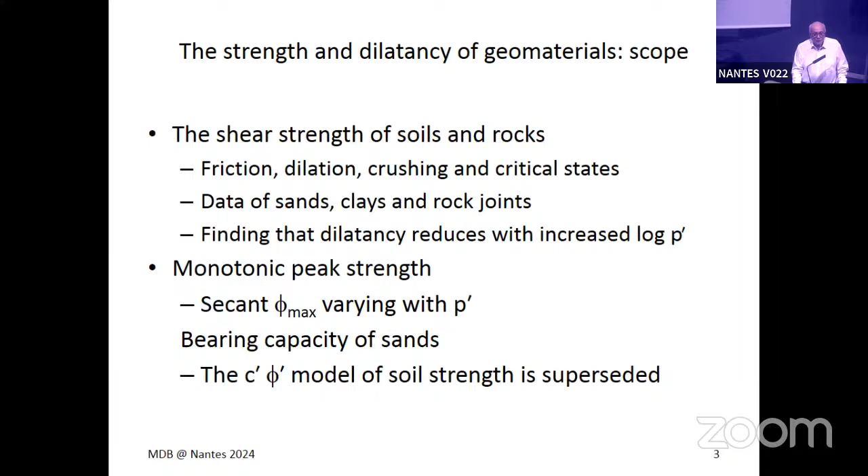As you can see, the not-so-hidden agenda on the last line is to try and persuade the geotechnicians among you to dispense with the linear envelope of a Mohr-Coulomb criterion.

So we all know what these materials look like. I've just shown a picture of a sand, a clay, courtesy of Pierre Delage, nice microscope views, and a rock joint from Nick Barton. I met Nick Barton about 20 years after I published Strength and Dilatancy of Sands.

We shared a coffee together, and at that point realized that he had undertaken a study of the strength and dilatancy of rock joints, which effectively told an identical story, as you will see.

It's the incompatibility in a granular material between an analytical macroscopic surface that you might want to analyze and the fact that grains or rock asperities collide with each other, that creates a confusion and a source of difficulty of understanding for geomechanics people.

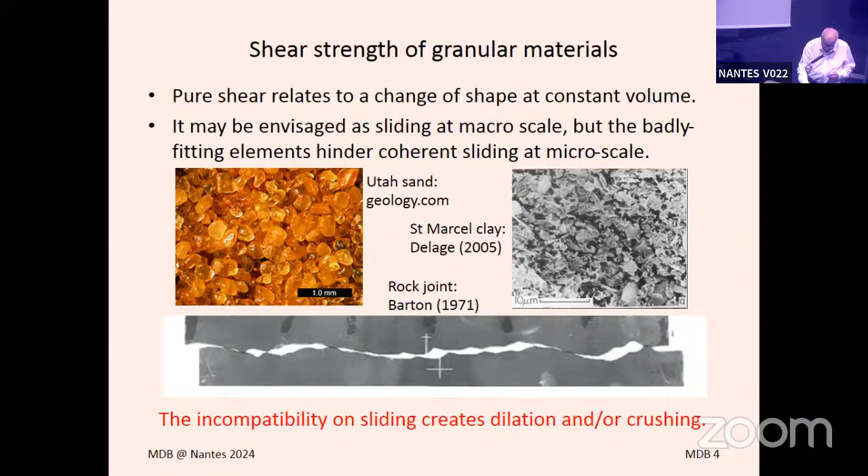The view that I have, or had originally, was bottom left: the interference between two micro-scale protrusions. So you can think of the bottom picture there as a grain inside a simple shear or direct shear apparatus, interfering in shearing on the black plane with a grain in the lower part of the box.

At its most simple, the question then arises: will one of these grains break, permitting the shear to take place? Or will the top grain ride over the lower grain at what I've shown here as an angle psi, which, if it did do that, would be the angle of dilatancy.

So in this very simplified view of friction and dilatancy, we have a macro plane of sliding, which is the black plane, the horizontal plane in the diagram here. We have psi, the angle of the actual shear surface.

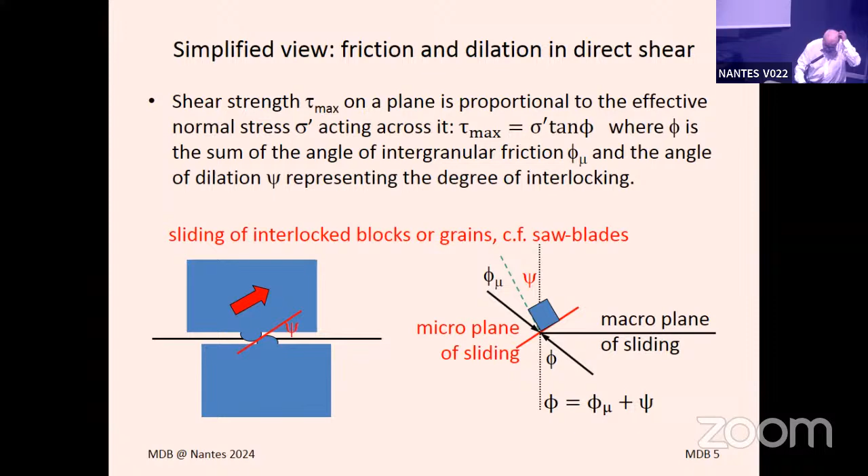So in the very bottom line of the slide, the apparent angle that we call the angle of friction, phi, is made in this simple view of two components: phi mu, which really is friction, and psi, which is this geometrical effect of the difference between the microplanes of sliding and the apparent macro plane. So there are two components, friction and dilation.

A question of a semi-technical nature: can I plug a mouse into this computer? Does anybody think? Because I have a mouse. I've forgotten how much I use... my pointer. Very good. Thank you very much. Sorry about the interruption. Thank you.

Oh, yes, yes. So, having introduced that, that there are two components at issue in what we call the angle of friction of soil.

I now spoil that by pointing out that if you do discrete element analysis, as Colin Thornton did with his research student Barnes in 1986, and if you plot the magnitude of contact force between two disks, this is a two-dimensional array of disks, where the thickness of the line, the blackness of the image on the screen, is proportional to force.

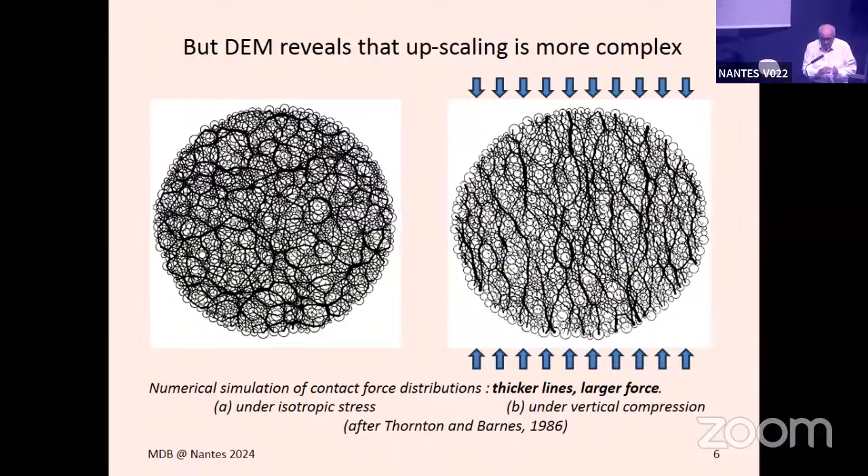So chains of grains that have almost coincident contact normals can act as potential struts in a three-dimensional truss, since soil is actually a three-dimensional granular structure. The other grains, carrying almost no force, act as sufficient bracing to the truss to prevent it buckling or disintegrating.

Eventually, if you increase deviatoric force, there is deformation at grain contacts, maybe crushing, maybe sliding, that causes links to disintegrate. Then the grains have to find a new equilibrium. They move until some arrangement finds it can carry the load. That is the source of deviatoric or shear strain, the grains slightly readjusting their position to find a new stable, strong force network.

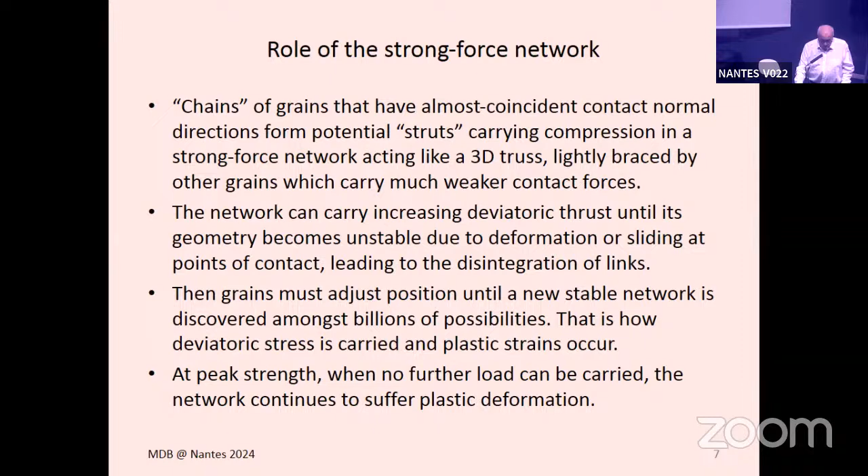Let us move on to some further information: the angle of friction of silicates on silicates.

An atomic plane of quartz sitting on another atomic plane of quartz, like two glass-like surfaces, has a very low friction angle of about 10 degrees. There's a paper by Matthew Coop and his co-workers, Senetakis and Todisco, in 2013, demonstrating this surprisingly small friction angle. If you shear soil or sand at constant density, and it's not dilating, maybe it was just loose sand, then you get a much larger angle.

This is the critical state angle of friction. You can get that from the ultimate strength in a shear box test, a simple shear apparatus, or a triaxial test, if you go to the trouble of drawing a Mohr circle of stress and dropping a tangent onto it from the origin. What you find is that for rounded quartz sand, you get maybe 32 degrees.

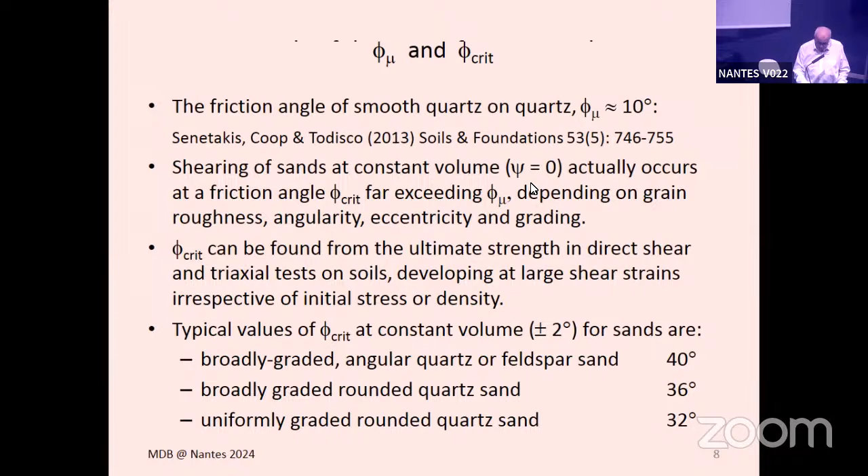So the question arises: if the angle of friction of quartz on quartz is 10 degrees, and the lowest conceivable angle that we call friction at a critical state, when shearing sand at constant density with no dilation, is 33 degrees, where does the other 23 degrees come from?

To cut a long story short, it's difficult to illustrate why that is the case. We just find that it is. We find it in soil tests that 33 degrees as opposed to 10 degrees. We find it in discrete element analysis, where the computer analysis of contact deformation gives us, if it's a very careful simulation, the same large angle we would call the critical state angle of friction.

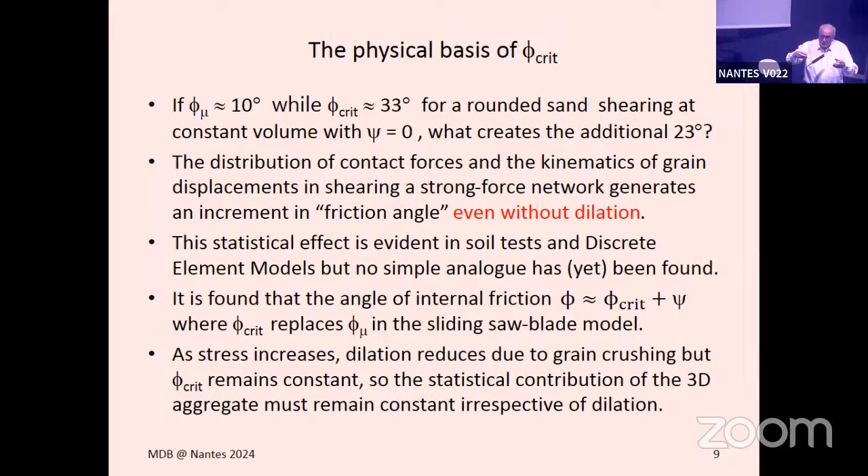And so we finally arrived at the well-known position that if we plot secant phi, that is dropping a tangent from the origin of a stress graph onto the Mohr circle, or finding the inverse tangent of the stress ratio, shear stress over direct stress, then for a dense material, we get phi max, which, as I just told you, can be in excess of 50 degrees.

And then that phi value drops eventually on continued shearing to its critical state value. If you've got loose soil, it painfully climbs up its shear stress strain graph until it reaches the same critical state value. The loose soil contracts, gets smaller in volume, the dense soil dilates. So this is familiar to us all, I suppose.

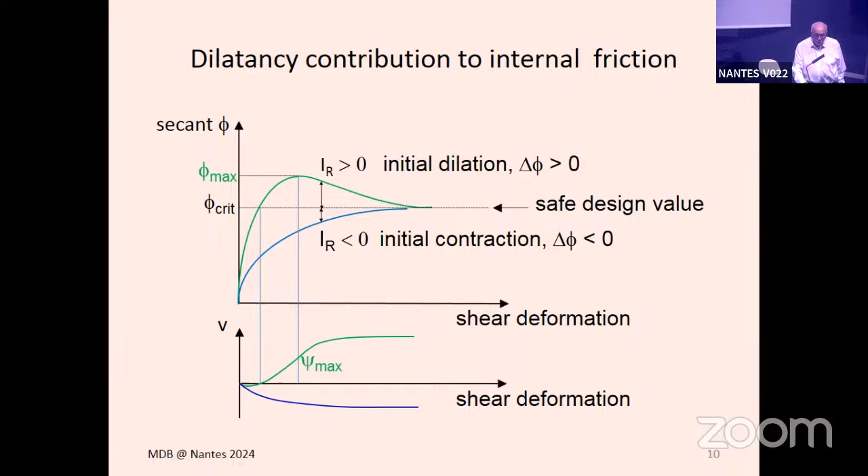40 years ago, I did a desk study looking at all the publications I could find that included the angle of friction, angle of shearing resistance of sand. And I collected all that data together and was fortunate enough to see a pattern in it. So I picked what I considered to be papers by the top laboratories around the world, published in the top 6 journals. And there were data of 17 sands. I'm not going to bore you with too much of that data, but I'm going to show you just a little bit of it.

What I did was study the influence of relative density, defined in the usual geotechnical way, and grain crushing. And it's the grain crushing that creates the non-linearity in what I suppose we still call the Mohr-Coulomb strength envelope.

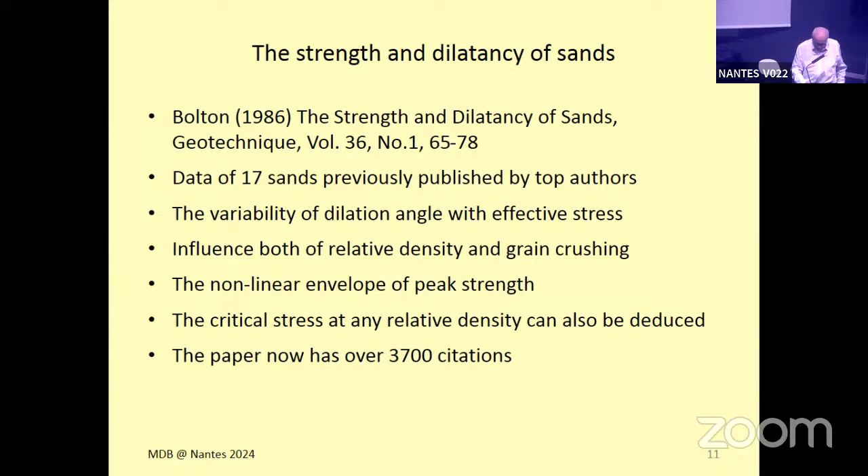So relative density, where we are on a linear scale between the maximum voids ratio of soil at its loosest and the minimum void ratio of soil at its densest. I intuitively felt that that was a better measure of density than the absolute density of a soil in kilograms per cubic meter.

Because that's actually very hard to define in the middle of a soil mass. It's very hard to find the voids ratio of soil. If you walk up to a dam and in order to analyze it, you had to know or find the voids ratio of the material 20 meters below the crest.

You'd find that a very difficult assignment. Whereas if what you need to know is the relative density on that relative density scale of the soil, not today, but as it was compacted, then there should be site records of compaction that would indicate within a certain margin of error what the relative density would be. Okay.

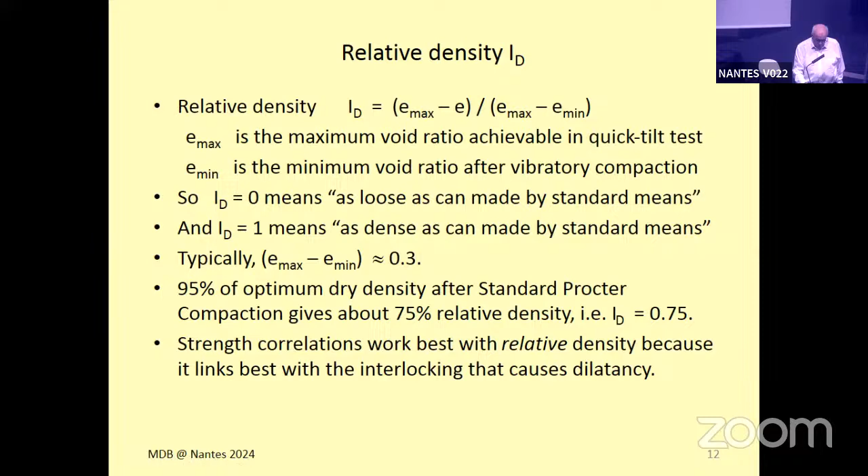So that first definition of relative density was important to me. The second, of relative crushability, I derived by looking especially at triaxial tests conducted at high stress levels. Research workers spoke about hearing the sand crushing and discovering that the grain size distribution after a test was moved towards the finer side of grains when you sieved the sample again at the end of the test.

And I made a definition that I'll show you in a second of the aggregate crushing stress. And typical values of that turned out to be 80 megapascals for sand, for silt, quartz silt, rock flour, 20 megapascals for sand, unless it was a carbonate sand, broken shell fragments, for example, in which case it would drop below that to some quite low value, like 5 megapascals.

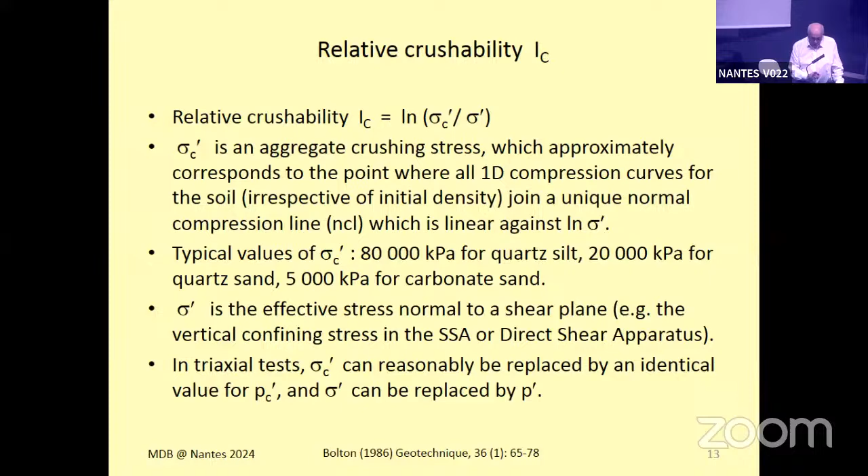So if sigma dashed is the effective stress normal to a shear plane, so the confining stress in a shear box test, for example, or if in a triaxial test, you change the symbol to P for the mean effective stress, and look at PC dashed, those are going to be the crushing, aggregate crushing stress. And let me just show this.

So you set up in the laboratory at very low stress level, when the logarithm of the mean effective stress is 0 and you're at 1 kilopascal confining pressure, arbitrarily down there, then you've got Emax and Emin. So in laboratory characterization or site characterization at low stress levels, that's a convenient measure to make. You can do that.

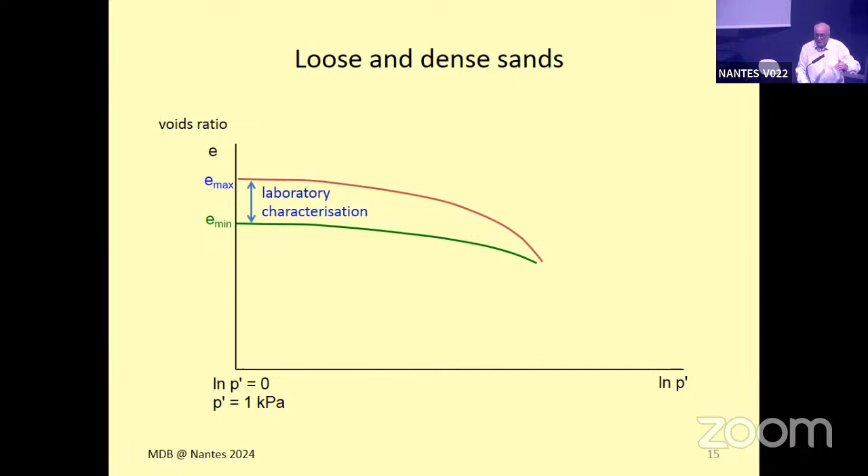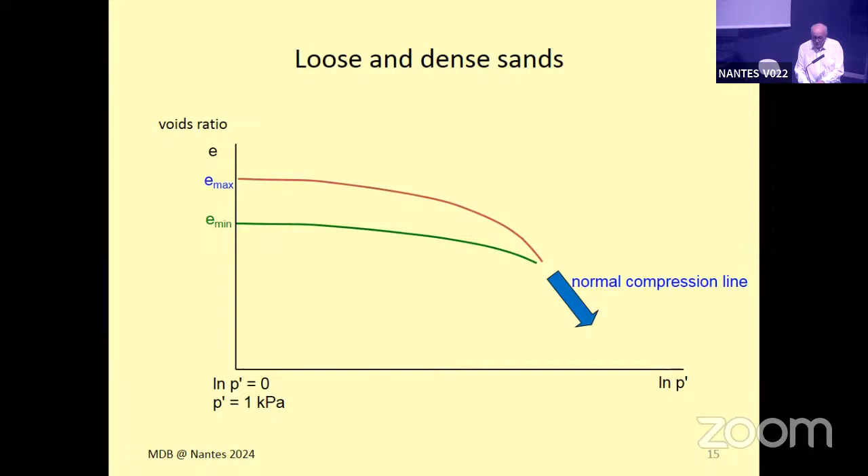But at very high stress, we know that all granular materials find what engineers call the normal compression line. So this is a much steeper line on voids ratio log stress. And in research this last 20 years or so, people working on micromechanics have understood that the normal compression line is a line of continual crushing of grains whose sizes fall on a fractal distribution, whose slope is about 2.6.

It's another sort of mystery of life, a little bit like the extra 23 degrees. But in this case, entirely to do with the repacking of a granular material when the grains fracture and the statistics of that.

Glenn McDowell, who was a research student of mine more than 20 years ago and is now a professor at Nottingham University, has worked on that fractal aspect throughout his career.

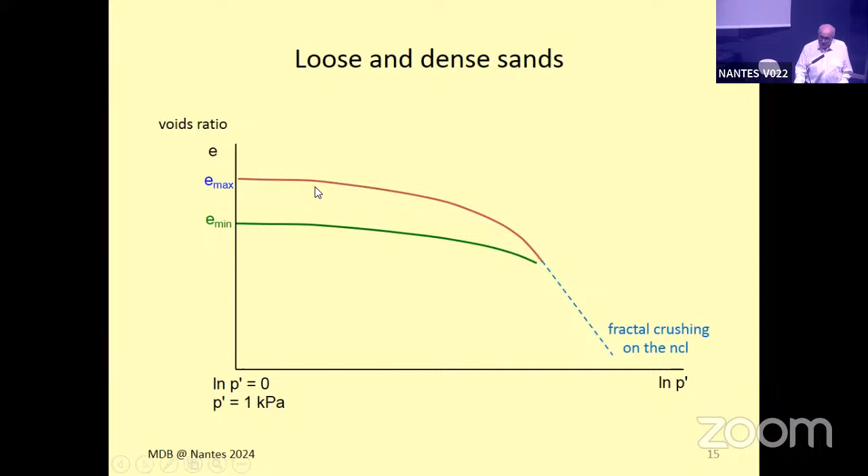So we start off with almost indestructible grains as we increase the stress, with very small gradients on this compression plot, and we end up with normal compression. I've marked off a place now which corresponds to the aggregate crushing strength as I imagined it, at about 20 megapascals, when the compression curve for dense sand and loose sand converge perhaps onto a unique normal compression line.

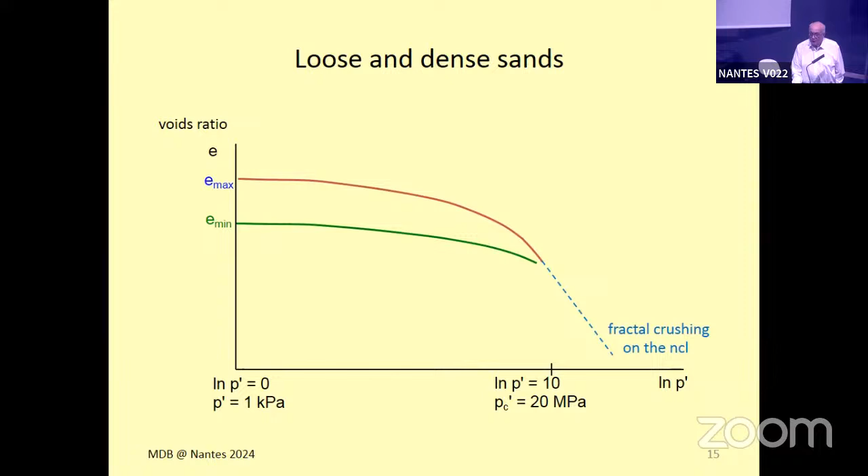Now, if you measure the voids ratio of soil continually shearing at constant volume, then by definition, that is soil at a critical state. And the critical state plot on this diagram of voids ratio against the logarithm of stress is also a curve until you get to high stress for sand.

I know many of you are studying the behavior of clays in different experiments. You'll have to keep reminding yourself that everything is going to turn out to be the same in clays, but for MPa, you can refer to KPa.

Clay agglomerates are at least 1,000 times weaker in breakage than sand grains. I've gone off at one of my tangents.

So the critical state line is the red line. And it reminds us that dense sand dilates if you shear it.

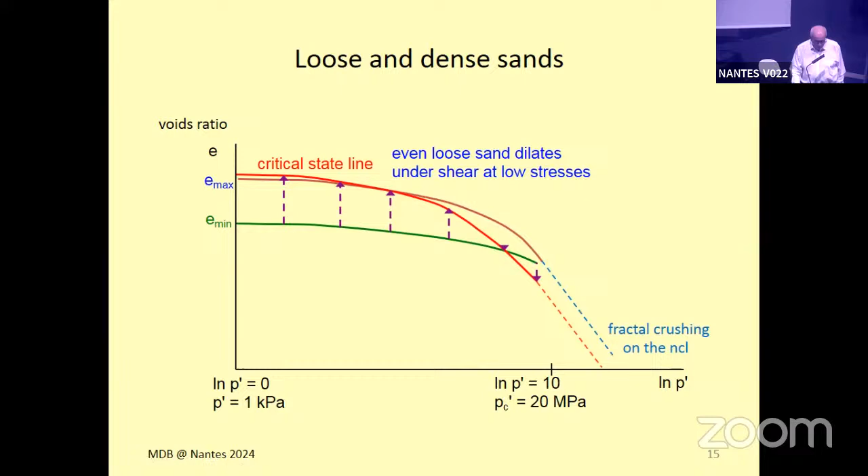Very difficult anyway. And even dense sand contracts under shear at very high stresses.

So bearing in mind the importance of the angle of dilation to what we call the friction angle of soil, it seems important to have rules to predict how much dilation under these various circumstances you're likely to get.

And so obviously you need two measures of relative performance. You need relative density that on the void ratio axis tells you where you're starting. And you need relative stress

that dictates where you are between 1 kilopascal and maybe 20 megapascals. The higher the stress level, the greater the tendency to contract under shear rather than dilate.

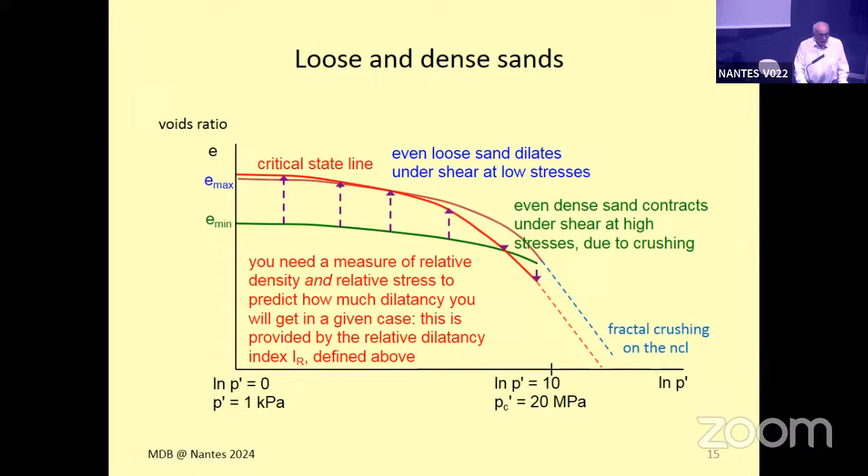So if the dilatancy is a function of these two independent variables, it very fortunately occurred to me that a relative dilatancy index could perhaps best be defined by multiplying the relative density by the relative crushability.

You recall that the relative crushability was the natural logarithm of the aggregate crushing stress divided by the current effective stress level.

So IR equals ID times IC minus 1 is an empirical equation that I saw coming out at me when I looked at all these different publications on the strength of sand.

And what it told me was that phi max minus phi crit is roughly, well, actually quite accurately, 0.8 times the angle of dilatancy.

At the start of this talk, you'll remember that I got something analogous. I got phi max minus phi mu equals psi max.

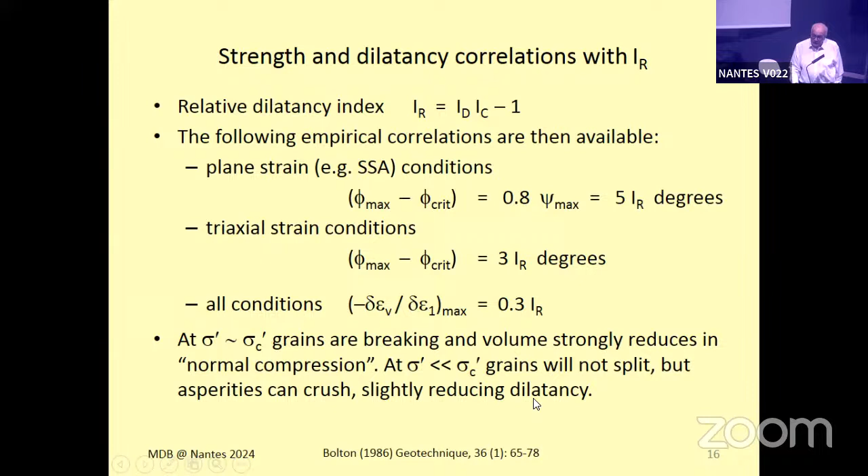and slightly reducing dilatancy. So the effect of that was shown, for example, by the data of Berlin sand, quoted in that 1986 paper. And so here's the full variation of angle of shearing, phi max minus phi critical in degrees, somewhere on the range 0 to 17 degrees for Berlin sand.

At 20 kilopascal stress level, maybe 17 degrees at 95% relative density. But if you raise the stress level to 600 kilopascals, I think this was De Beers' work, you've dropped to 7 degrees. So you've reduced the secant angle of friction by 10 degrees.

At every different stress level, there's a different black line representing precisely the correlations I showed in the previous slide: 3 degrees times relative dilatancy, or 5 degrees, depending which apparatus you're in. Here, it's the 3 degrees. The typical deviation between all this test data and what I've shown you, with IDIC minus 1 as relative dilatancy and 3 degrees or 5 degrees as the extra angle, is only about 1 degree. That's the standard deviation.

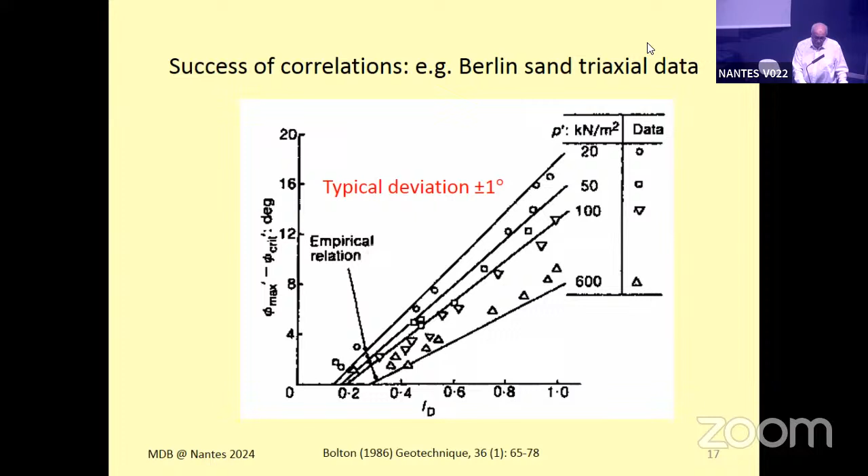So here we are. Imagine you've done a single soil strength test, maybe a shear box test. You've got your first data point of shear strength versus mean effective confining stress. That's the red dot. What will you then do? You will remind yourself that you want a range of stresses, so you will go on to do perhaps 1, 2, 3, 4 more shear box tests, and you'll get a range of data that would look a little bit like that.

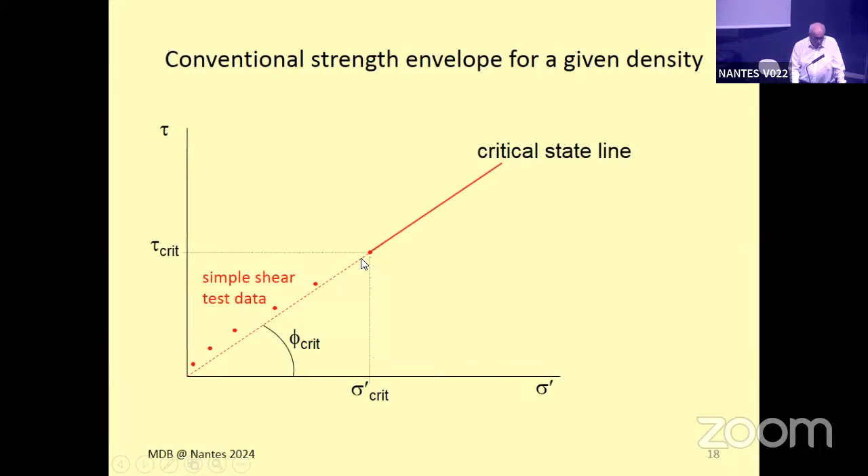And then, unfortunately, what we've been taught to do since the 1930s is to take a straight line fitted to some part of this data and give it the equation: strength is C dashed plus sigma dash tan phi dash. A most unfortunate circumstance.

Because what do you call phi in this case? People do call it the angle of friction. But Coulomb would not recognize that as the angle of friction. Coulomb would recognize the ratio of shear to normal stress. That was his ratio. And worse than that, we've ended up with an intercept, C dashed, that, as you can see in the data, does not exist.

And so it needs a name. Engineers want to have straight lines. So C dashed is now brought into existence, and at least in the English language, it's called true cohesion. What is it called in French? It is called true cohesion.

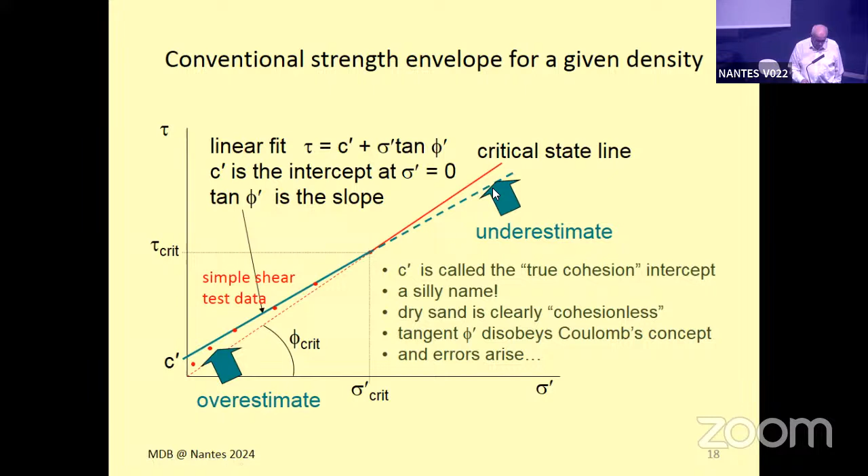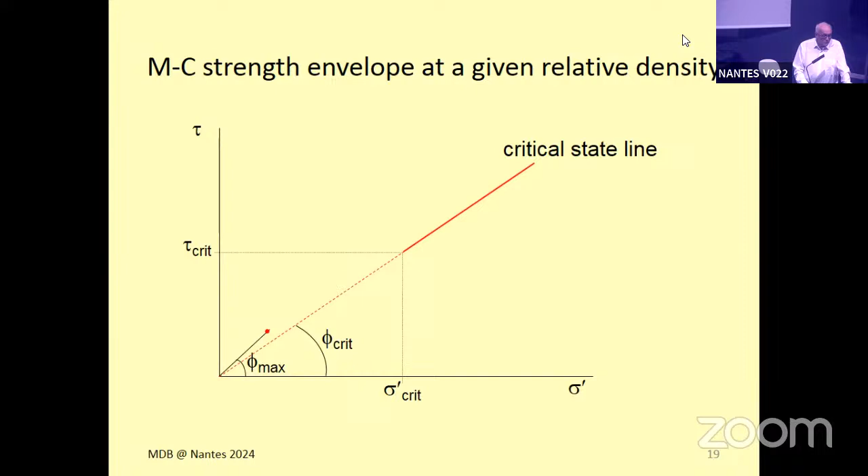So what you could do instead is simply accept that the correlations I've shown you are a reliable guide to the strength and dilatancy of sand at every point. So if you use the information I've given you, phi max, the largest Mohr circle, is phi crit plus 5 — that's the 5 degrees in plane strain when you're not wasting any dilatancy — times relative density times relative crushability, which is the natural logarithm of the crushing stress divided by the current effective stress level, minus 1. That lets you plot each one of those data points fairly precisely, within 1 degree deviation statistically.

So it's a sort of polar representation of the data, not a Cartesian representation. But there's nothing wrong with it. Mathematically, it's well defined.

If, on the other hand, you insist on drawing a curve through the data, then at least it will be a curve, and it turns out to be a power curve. That is, its equation is tau max over tau crit equals sigma dashed over sigma crit to some power beta, which is a simple function of relative density. So at relative density 0, you just get the straight line to the origin. At higher relative density, it's got a little bit of nonlinearity to it, and then beyond the critical state value, it's linear.

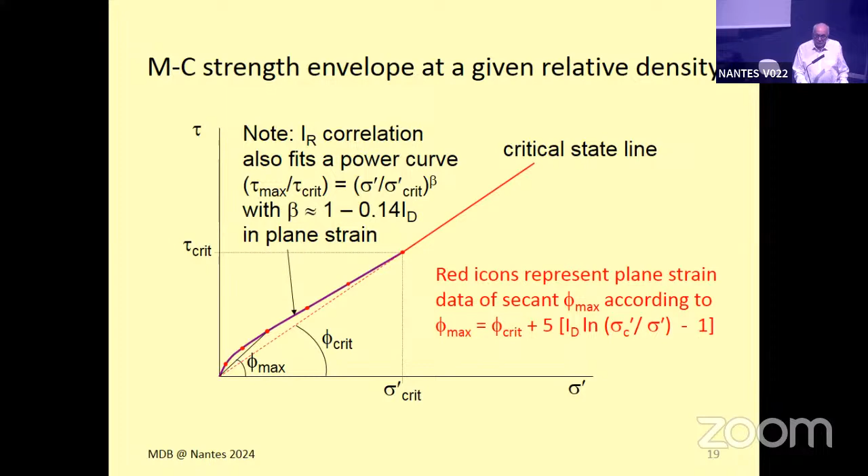So you can approach it either way. You can take the expression offered, phi against log stress, and use it that way. Or you can fit a power curve by plotting the logarithm of stress on the axes.

All you've got to do to predict the strength of sand is recognize that phi max is a function of stress, as I've just shown you. And in a problem you've got, a dam or whatever situation you might analyze, the stress is a function of phi. So you have to make an iteration by guessing a phi value and then successively correcting it as you keep reanalyzing the problem.

Now you've got a better estimate of the stress, you can get a better estimate of the angle of friction. Our personal computers are so fast these days that there's no reason why we shouldn't all be doing that. It would endlessly remind us that phi, the angle of shearing, is not a material constant, as I've just spent quite a long time illustrating. So yes, you would need to do an iteration.

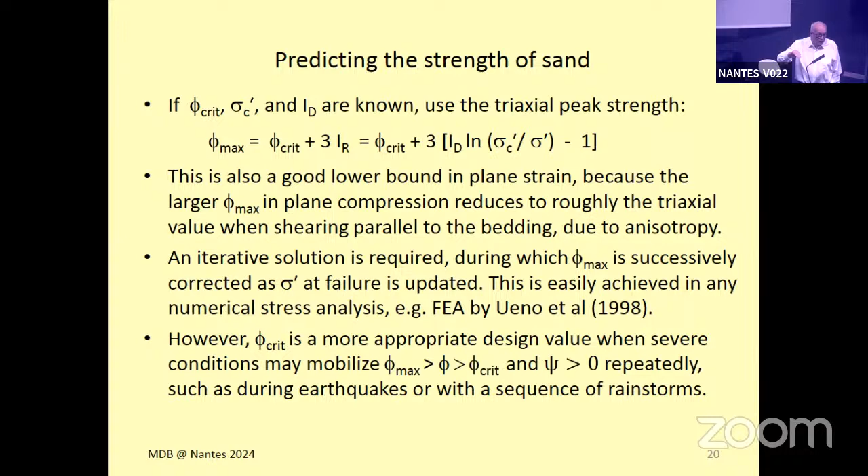If that has been happening every cycle of an earthquake, then each cycle there's some dilation. The soil gets looser and looser because of the dilation, and it ends up having a strength of phi critical. The same if you've got a landform subject to groundwater levels that vary season by season - that might have exactly the same effect as an earthquake in continually shearing the soil, causing episodes of dilation.

So that was sands, and it's 3 o'clock. If I were to show you the details of too many other sorts of material, we'd still be here when it's time to go home. So I'm going to accelerate now through some other aspects.

Why not treat that arrangement of platelets as crushable grains themselves? So you're not trying to imagine the crushing of a single clay platelet, but of a group of them. We know that what's important with clays is that as you consolidate them, you will squash the voids down. And then if you let them recover back to an over-consolidation ratio, the soil will seem to be quasi-elastic, but it's possible to destabilize the clay by shearing it, and then there will be further collapse.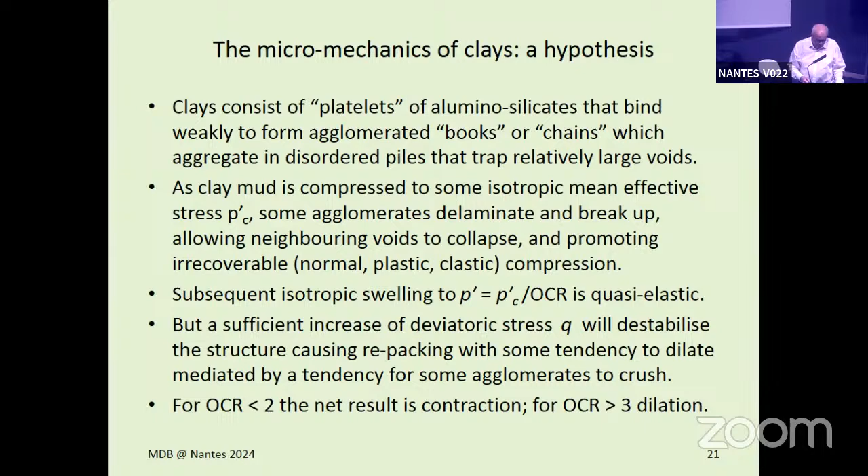In the data, for example, of Pierre Hicher and his research student Hattab, 2004, we can see a normal compression line that I would now call fractal compression, and a critical state line parallel to it, or maybe it veers off to the left a little bit, curved here. If you over-consolidate, in this case from 1,000 kilopascals - this is kaolin - and you stop off separately at these individual stations and do constant stress tests at different over-consolidation ratios, then, as I showed you for the sand, you've got contraction at high stress. It's just that high stress here is anything bigger than about 250 kilopascals, and low stress is anything smaller. And so there's dilation at low stress.

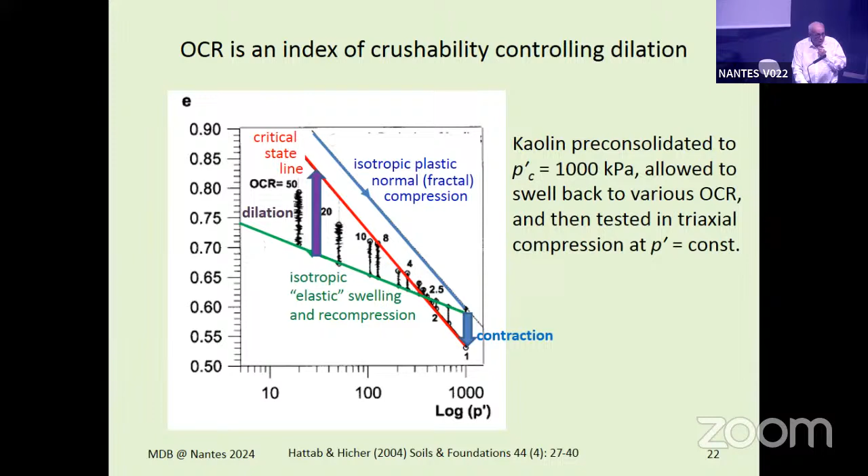So clay and sand share the same features when you consolidate and shear.

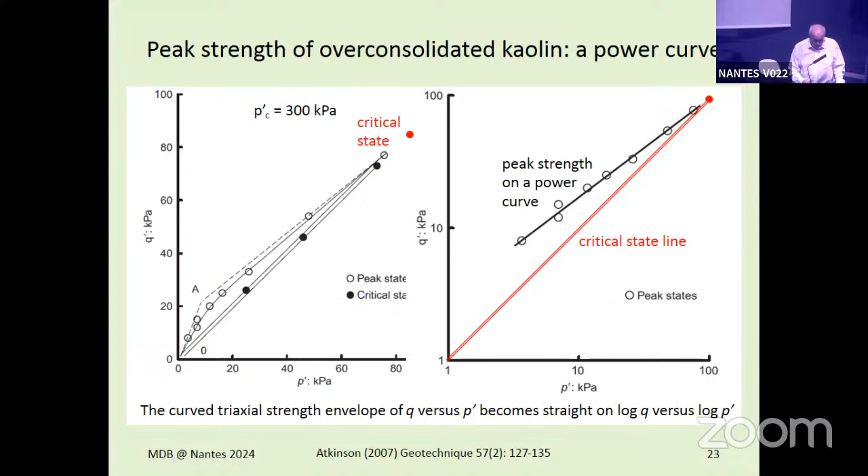And as John Atkinson of City University in the UK showed at about the same time, 2007, if you plot deviatoric stress against mean effective stress, then again for over-consolidated kaolin, you get what should now look like a familiar curve of data, which if you plot on logarithmic stress axes, plots as a straight line. So this is another power curve, not a linear Mohr-Coulomb strength envelope. And then if you continue shearing, you get a critical state angle, which for clays tends to be about 23 degrees or thereabouts.

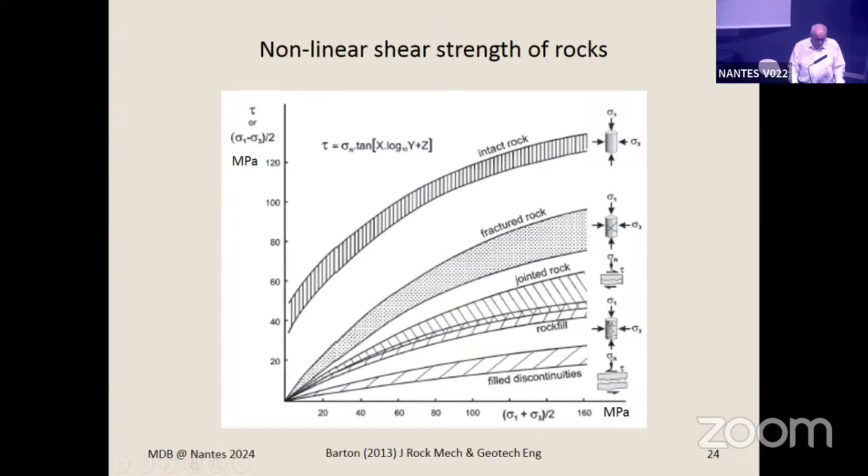In rock mechanics, the derivation of strength was started by Patton in 1966, writing an equation identical to the one I started off with, of interlocked particles, like interlocked saw blades.

Barton and Choubey modified it to the second set of equations I had, where he called this a residual angle of friction. It's what I think we would now call the critical state angle.

And the extra dilation was a roughness coefficient multiplied by the logarithm of the uniaxial compressive strength of the waviness or asperities in a rock joint, compared with the mean normal effective stress.

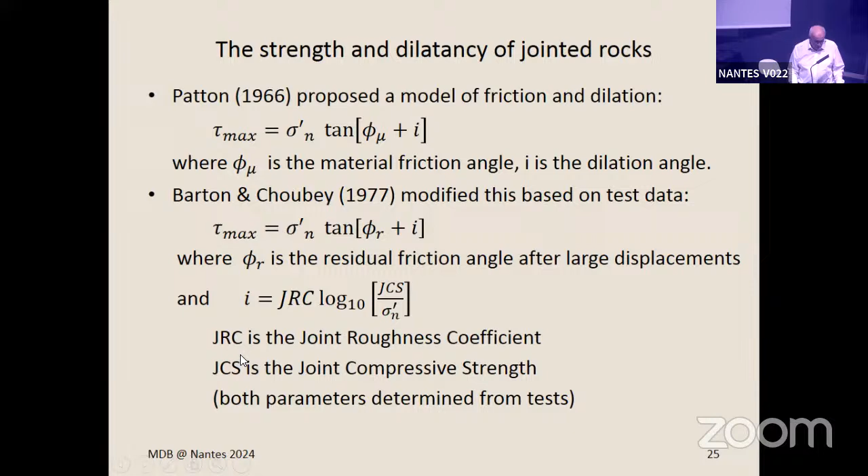So it's identical to sand and clay, but with different definitions. Barton was very careful to define those terms so that they could be related to field tests on rock joints.

Rewriting in soil mechanics terminology, tau max equals sigma dash normal times tan(phi crit plus psi). That's effectively the same for sand and clay.

And the dilatancy is defined as a relative roughness multiplied by this logarithmic ratio of crushing strength to current effective normal stress.

What was important to Nick was to find a practical measure of these two parameters he's introduced. He specifies a Schmidt-Hammer rebound test, which correlates very well, so he assures us, with the crushing strength of the asperities in an uneven rock joint.

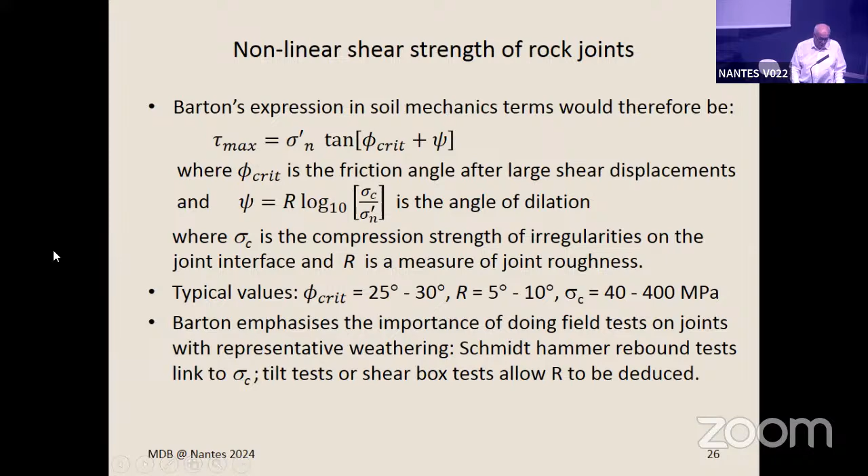And you do tilt tests or shear box tests to find the parameter R that fits the data.

So all these different materials obey the same sort of laws, and the only difference between them is one of convenience of definition. In clays, it's easy to consolidate them, so we tend to reference the consolidation stress instead of a crushing stress. In rock joints, it's the exact opposite case.

You may need to do a rebound hammer test to empirically estimate the compressive strength of asperities. And in sands, well, you're sort of in between the two states, but you do need a definition of relative crushability and relative strength.

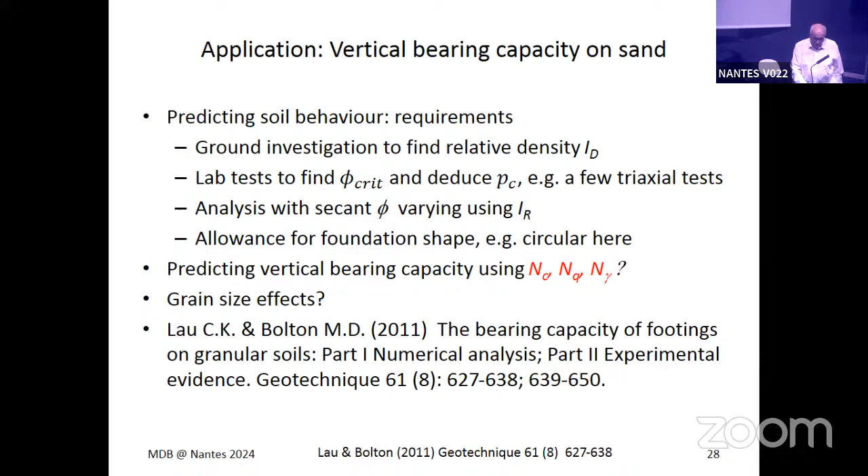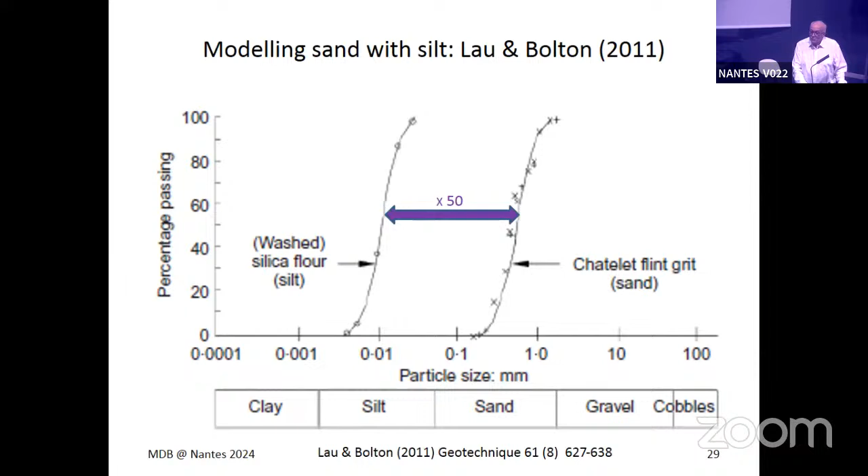So we wrote a theoretical paper and wrote up the final data in an experimental paper. We studied Châtelet flint grit, a very angular silica sand. CK was an outstanding research student, very patient, and he washed silica flour with identical chemical composition, pure silica, but 50 times smaller, making sure the grain size curve was identical but 50 times smaller. So we could look at various scaling issues. It's a really nice thing to do for centrifuge modelers, and I recommend it, but you need a very patient research worker to achieve this.

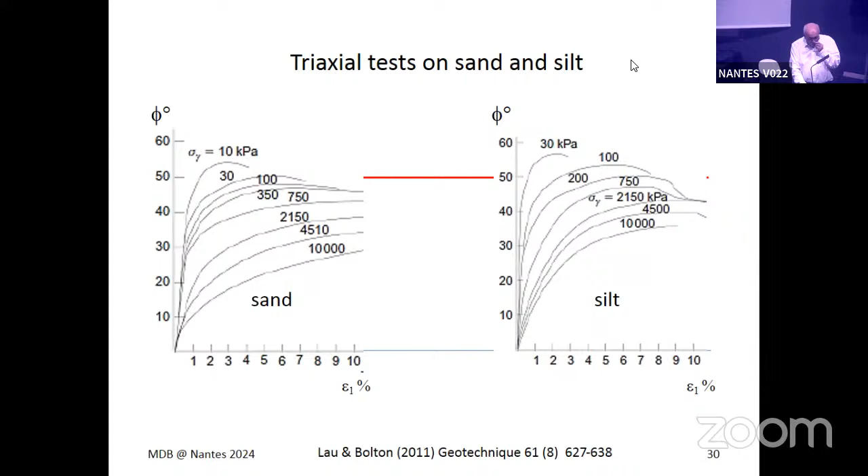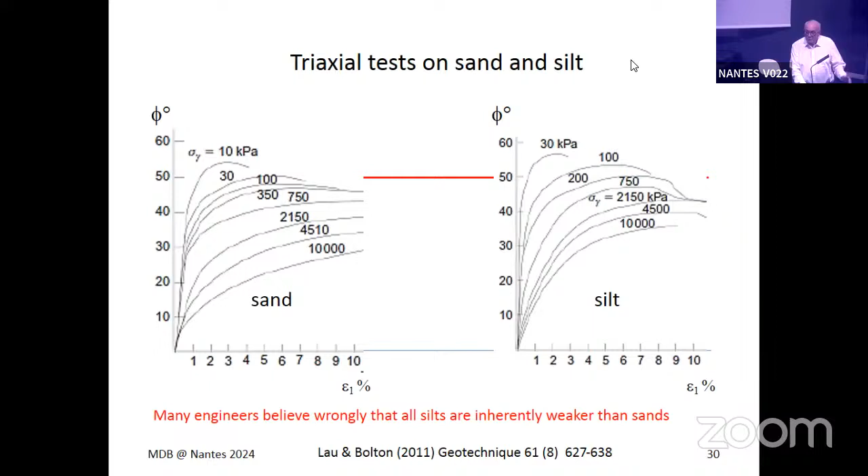This should not surprise us because of the importance of crushing - that is, the fracture of grains. Small grains have small flaws, small micro cracks, and so they're stronger than big grains. So at every level, there's more strength and therefore more dilatancy. I was always under the impression before doing this work that silt was inherently weaker than sand. Well, under some circumstances it's not as reliable, for example in liquefaction problems, but actually it's stronger.

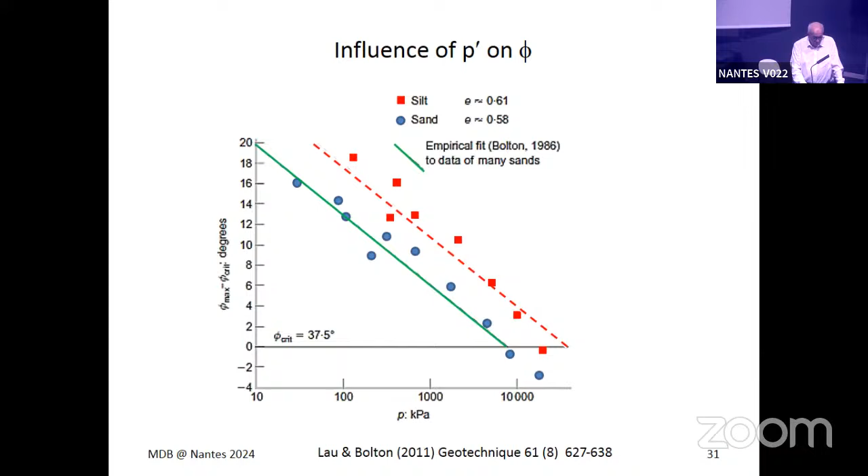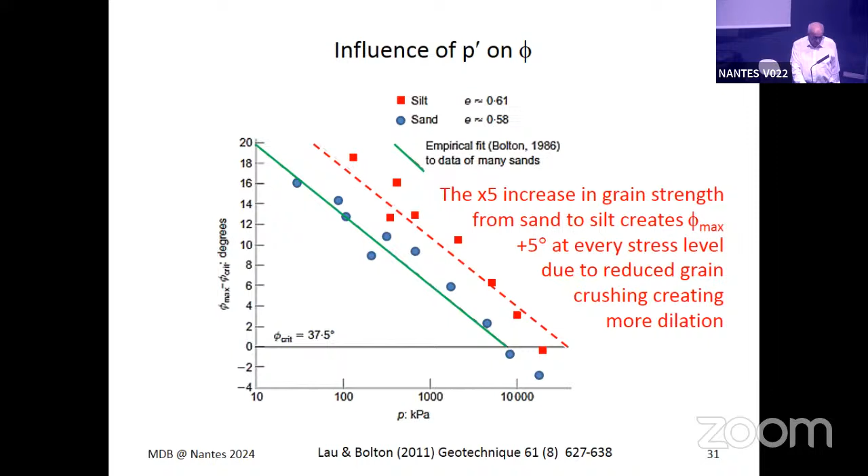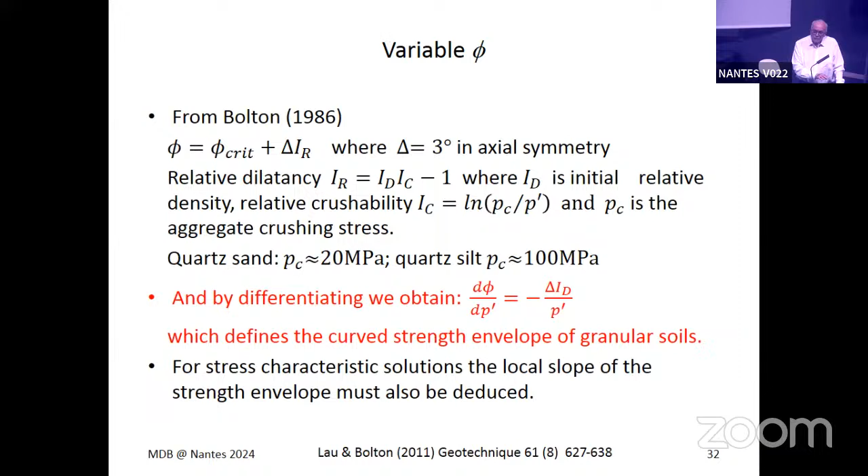So the variable phi I've shown you was phi crit plus some angle delta, which could be 3 degrees in axial symmetry, triaxial test. If you differentiate that equation with respect to stress, you get d phi by dp dashed is minus delta over p dashed times the relative density. I've just differentiated this equation. So this is a curved envelope of strength of granular materials. We explained how to move from that to a stress characteristic solution, like Prandtl's solution for bearing capacity, but here allowing secant phi to vary.

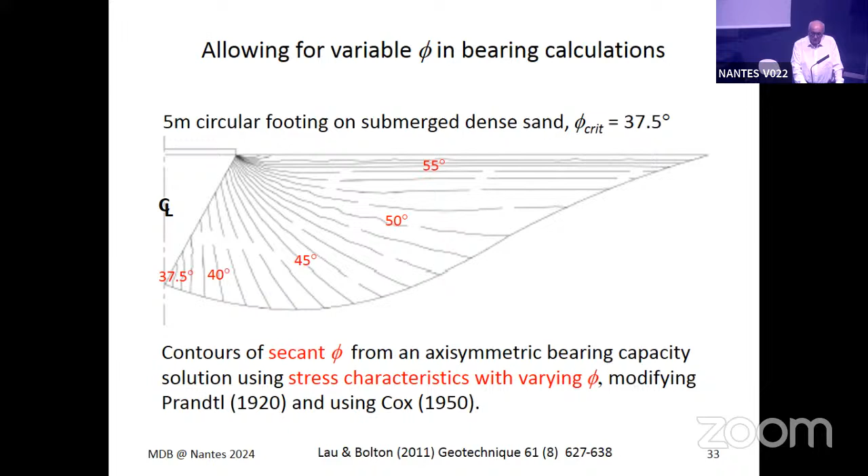So all that, if you're interested in chasing it up, is in the papers with Lau that appear on my website that you can download if you're interested.

So we then did 1G footing tests with surcharge and found that these new stress characteristic solutions needed no correction for whether the sand was wet, saturated or dry, or for the size of foundation. We were testing either a 14-millimeter diameter foundation or 100-millimeter diameter, and whether the surcharge around the footing was 5 kilopascals or 200 kilopascals. So one analytical method solved every situation. There was negligible softening after the peak, no strain softening, and in each case a good analysis.

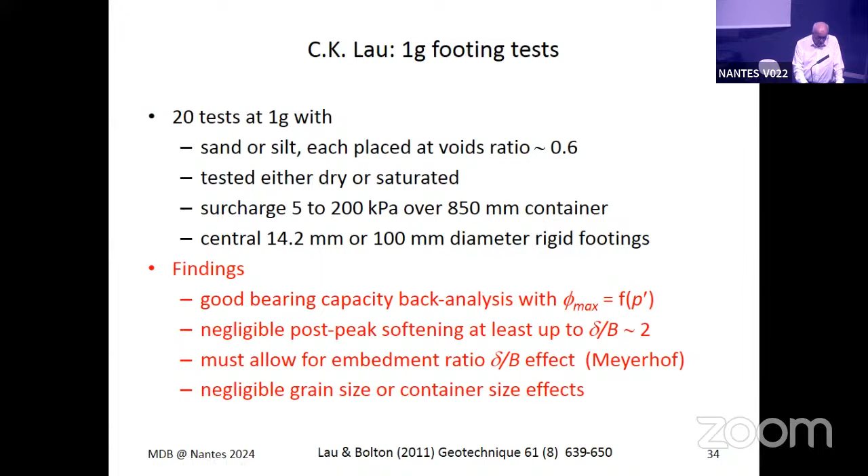We had to take account of the change of geometry once there was settlement. This is Meyerhof's effect, where this is very exaggerated - if you push a foundation down, you disturb the geometry of the failure cone, in this fashion. This is explained, from a 1951 paper, 70 odd years ago, from Meyerhof. So accounting for those two effects of geometry change due to penetration, permitting a greater angle in the failure surface.

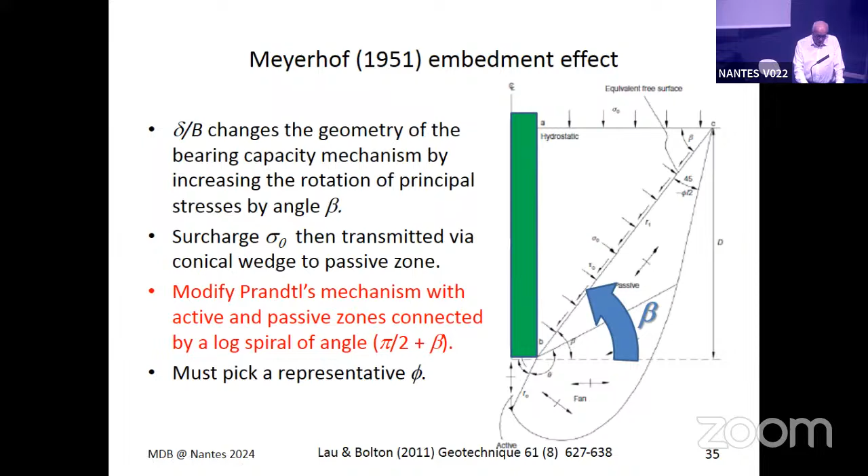We also did centrifuge tests, only 3, but we got very good results for this as well. He tested sand and silt, 14 millimeters, 100 millimeters, different G levels. And once again, we got good back analyses of capacity with this new technique of permitting phi to vary with stress, and according to Meyerhof, with settlement to diameter ratios increasing.

There was no chamber effect apparent with an 8.5 ratio between the chamber diameter and the largest footing. And there was no grain size effect at all apparent, even up to a footing to grain size ratio of 8,300.

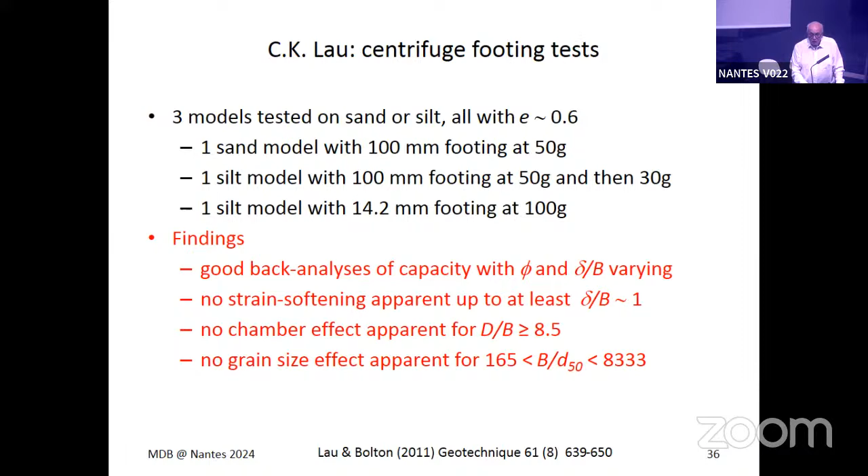So this technique of solving the correct equations means that you're excused concern about other effects that you would have otherwise worried about.

So when plotting data of foundation stress against settlement to diameter ratio of the footing, this gives you the N gamma value. So that's just using the self-weight term from Terzaghi, but you have to add the effect of the change of geometry due to Meyerhof.

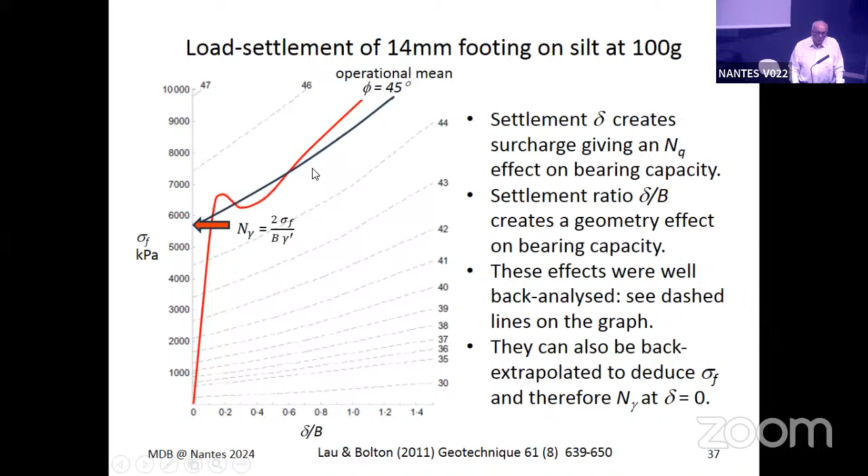So all that was understood. In design, you'd simply use the N gamma value based on this intercept before you started worrying about the settlement geometry effect.

And here on a plot of the logarithm to base 10 of the bearing capacity factor N gamma, 3.2 coming down to 2.1, plotted against stress measured as the multiplier outside the N gamma, the 0.5 times the diameter times the effective weight of the soil in kilopascals, the red line is a line of reasonable fit to the data, which are the red squares, and the blue line is for the sand, and that's a reasonable fit to the empirical expression for sands.

So the analysis, the variable phi analysis, fitted within half a degree of phi to the actual data. And these four green arrows are almost like the end point of the lecture.

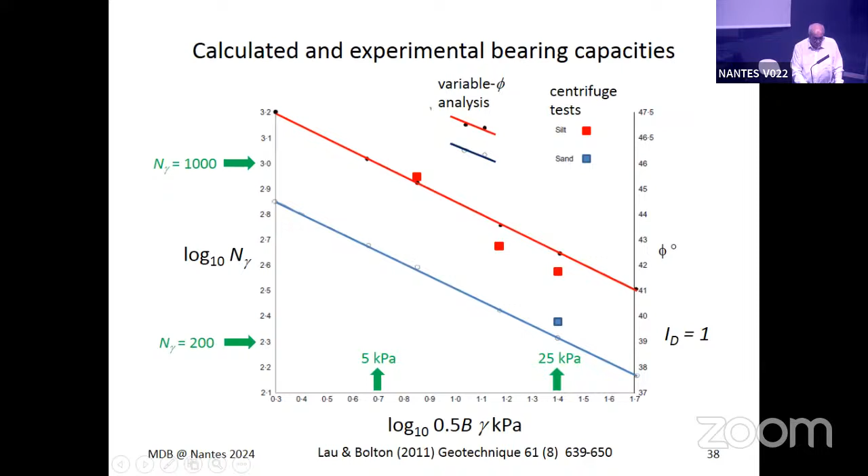So an engineer using one of the old textbooks like Terzaghi and Peck would very likely make an error greater than a factor of 3 in fitting a tangent to data that it didn't quite fit. And the disparity between a Mohr-Coulomb linear fit and using the actual data could be worth a factor of 3.

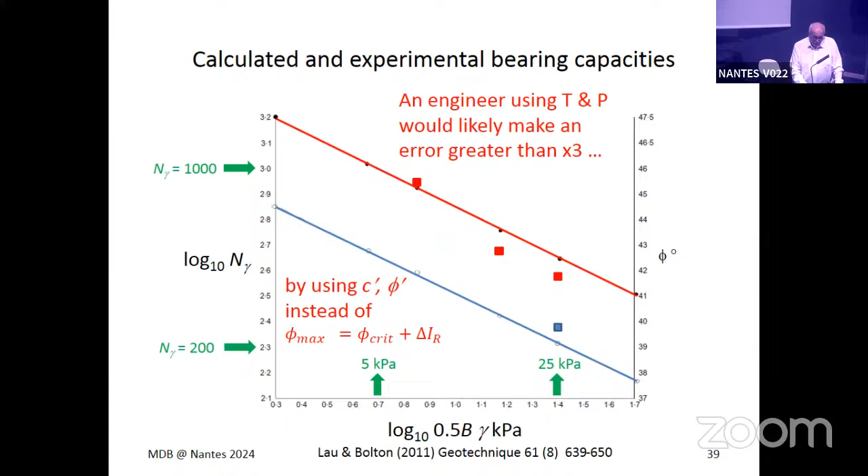So it will be the same story in a boundary value problem for fractured rock or for clay. I'm trying to convince you that it will be worthwhile modifying any solutions that you like to use with a Mohr-Coulomb linear envelope, so that you do this iterative solution instead and get the right phi value for each density and stress level.

So I've shown you that you shouldn't really be using linear Mohr-Coulomb envelopes of strength, that the bearing capacity theory only had to be enhanced a little bit to account for variable phi and variable geometry. And then, notwithstanding grain size and footing size variations, the same analytical model worked within a degree or so accuracy in every case, with no strain softening.

The vertical bearing capacity problem is insensitive to softening beyond the peak, because you keep cutting into new material as you push down.

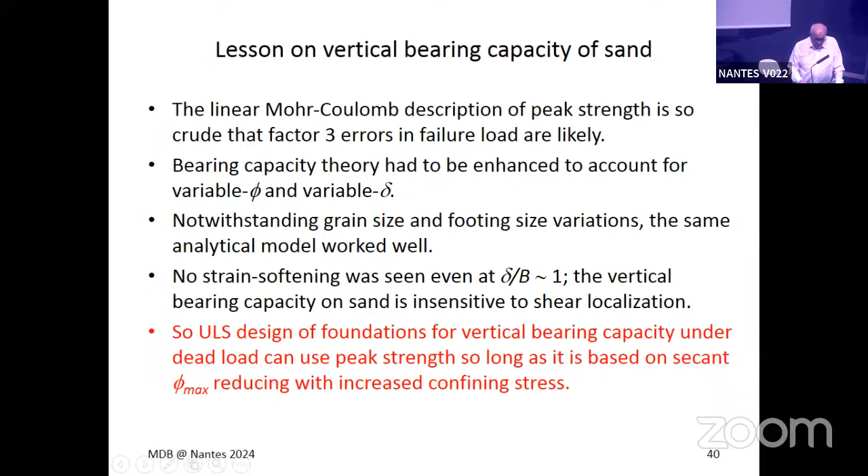So there we are, that was what I wanted to show you. That first of all, it's a little bit complicated. Then, thankfully, there are empirical correlations that appear to work, as far as anybody can tell, for all sands. There's a little bit of uncertainty, but not very much, over the crushing strength of granular materials. But it's very easy to determine what that parameter is.

And it's worth doing these things, because otherwise, in different problems, you might generate an error of a factor of 3.